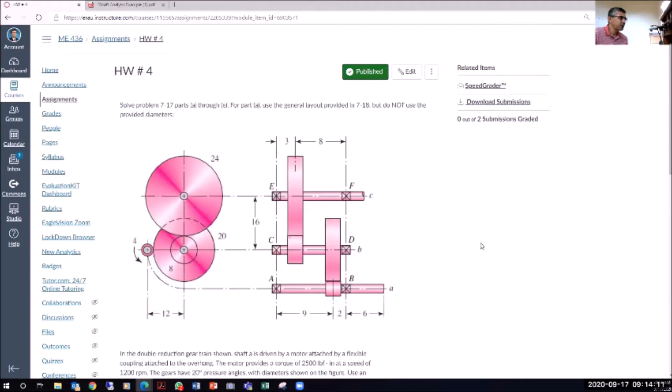We are given a motor that provides a torque, right? This motor is providing a torque, and we're looking at shaft A. You see this shaft A. So the torque is being... read the problem carefully. In the double reduction gear train shown, shaft A is driven by a motor attached by a flexible coupling attached to the overhang. So it's attached right here at the overhang.

So there is this input torque that is used to drive this gear, which is driving the bigger gear attached to the other shaft. But we're primarily looking at shaft A. So I know that my input torque starts at the overhang and ends at this center line where I have my gear. So my torque is only present in this area. If you go beyond that, there is no torque, but there is still some bending moment.

So as soon as you draw your bending moment diagram, knowing, of course, the forces, so you can calculate the forces, you can find where the critical bending moment is going to be. And if the moment is too small in this area, and you know that you don't have any torques applied, then you may focus on this area only where the torque is present.

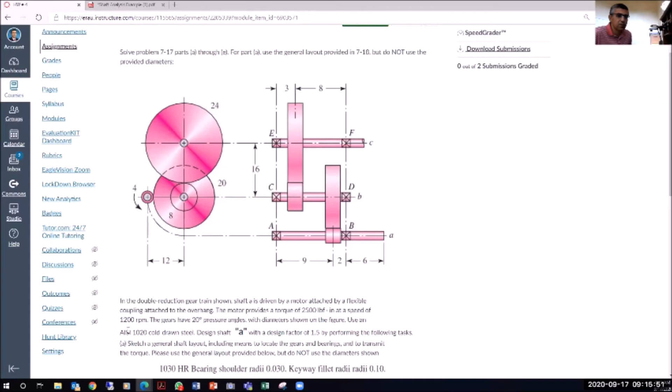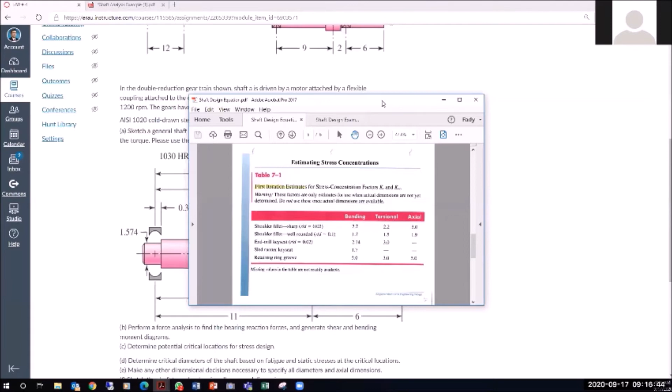So are we designing the type of, like, are we going to pick shoulder fillet? Are we going to pick end mill key seat? Because I don't think it's specified in the problem that we have to use a specific one? Correct. Okay. Thank you for mentioning that.

That's why in the homework I gave you a proposed design. Instead of having each one of you come up with a geometric layout, I already gave you a geometric layout. The one thing I don't want you to use is any of these diameters. So forget about these numbers for the diameters. I want you to solve for all of these diameters. So this is what you're going to be solving for.

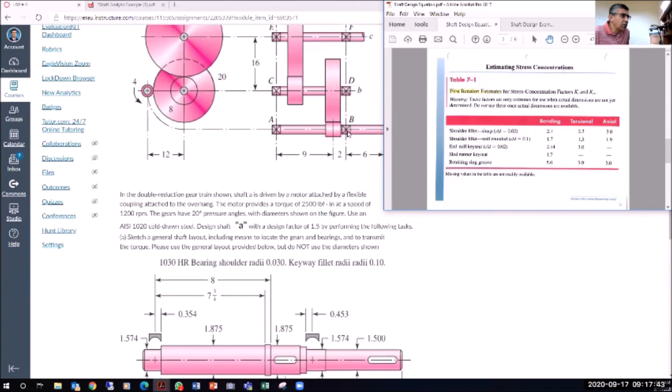So you know that there is going to be a step right here. You know there is going to be a step right here. You know that there is going to be a key here, right? And you know that there's going to be another step here. So you know some of these, and these are the ones I want you to take into consideration. So let's say you find that this is a critical section. What I'm referring to here is the location of the bearing. So I'm looking at B, right?

So at B, there is this diameter that they use as 1.574. I'm going to call this lowercase d. And then I'm going to have an uppercase D. And I'm going to say that this is going through a step. And because I'm using a bearing, if I want this to be leaning on the step, I may want to use a sharp shoulder fillet. So then this will lead me to use the 2.7 and the 2.2 when I am looking to calculate the diameter lowercase d here instead of the 1.574. Does that make sense? Yes, thank you.

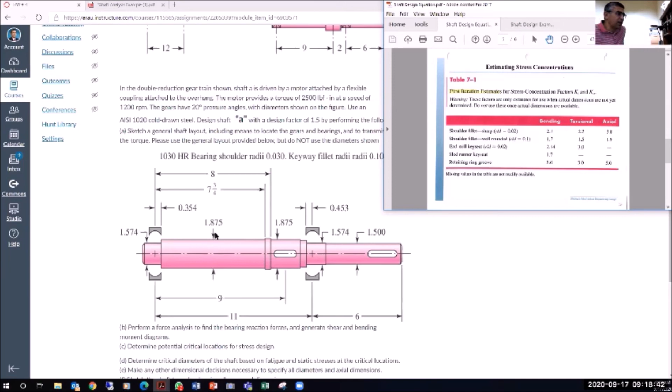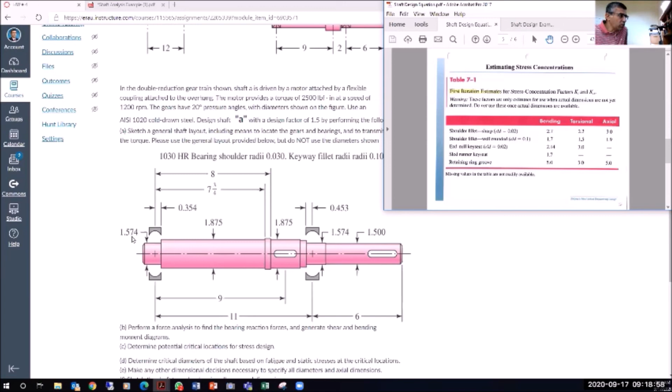Good, good. And again, I think luckily this problem is not as lengthy as the example because the critical sections are kind of obvious. So you know where you're heading, and then you may just carry over until you go back to the other bearing. But I'm really expecting you to come up with these numbers. And it's okay to have some of them the same.